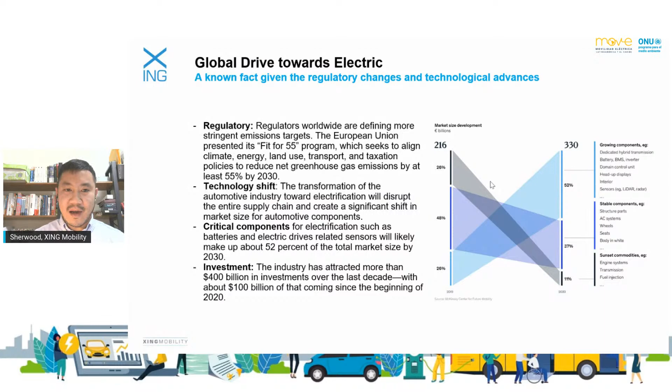I will start with an introduction to the macro landscape, which I believe many of you already understand a bit about in terms of dimension and perspective. We all know the automotive industry is one of the industry drivers for most economies, and we know that in the past internal combustion engine era, there were different segments showing different potential and profitability in the field. As we know, there have been technology paradigm shifts and changes in drivetrain approaches.

As we can see on the screen, I have quoted a report from McKinsey. It shows the market size and market portion changes. In the middle of the chart, you can see there are 48%, which we call stable components — structure parts, AC systems, wheels, seats, and whichever parts of a vehicle you can think of. Gradually, through the paradigm shift, this remains relatively stable but still decreases a bit, to 27%.

Between 2019 and 2030, there are a few components we believe would be dropping in terms of percentage — the original critical parts, engine systems, transmission, fuel injection — which might decrease from 26% to 11% according to McKinsey's research. The growing part, which I know is the critical and expected topic of today, would be dedicated hybrid transmission, batteries, domain control, and all the systems which would emerge in the electrification era. These we find would nearly double, growing from 26% to 52% in 11 years.

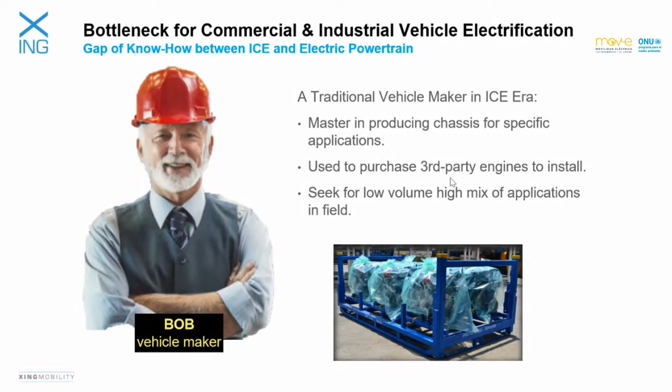Also, because of the variety of applications in the field, Bob is seeking low volume, high mix application capability. However, during this time, he suffers some bottleneck while pursuing electrification, because there's a de facto gap of know-how between internal combustion engines and electric powertrains. The gap we've identified is that the know-how is totally different, from automotive electronics to a high voltage system in terms of powertrain on electric vehicles.

So it's definitely not easy to inherit such ability from previous experience. That's also what we see in how other automotive makers are competing hard with Tesla, because this experience wasn't accumulated in the past development of their business.

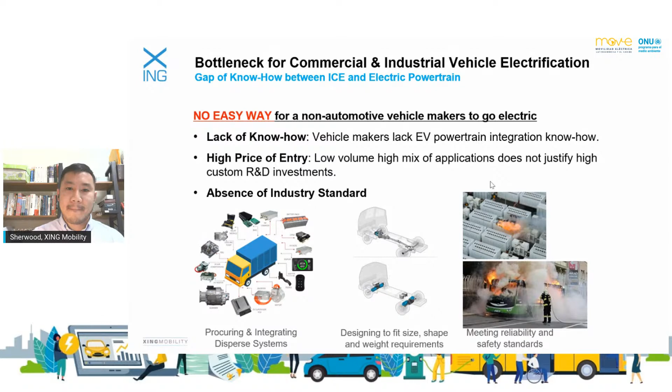Among these bottlenecks, there is a very serious part which would be challenging for all the mechanical engineering and technicians. Some of you might know Tesla is an expert on computing and the auto driving system. Tesla is also the largest battery pack provider in the world. Why battery pack is such an important factor is because on an electric vehicle, there is a very key factor which will affect the whole entire performance of the vehicle, which would be the heat.

We know the battery temperature would go high as we are charging and discharging the whole system. Now there's a second source of heat, which we know as power electronics, which could go as high as 100 Celsius degrees or even up to 175 Celsius degrees. These heat sources impact the whole system design and the whole management concept of the vehicle.

We know there have been a few car fire accidents with Tesla every quarter or every half a year. We also are aware that there was a very tremendous battery wall accident in Australia earlier, in August and September this year. These are deriving from the NMC battery cell characteristics in nature.

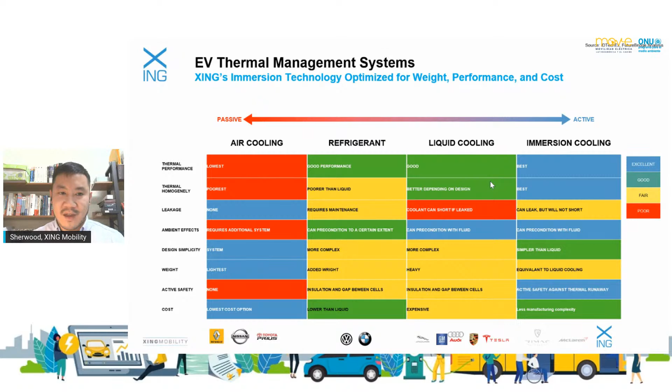I will not go through the whole table for you, but let me give you a quick conceptual explanation of immersion cooling, emphasizing some of the advantages of the system. Immersion cooling is to put the battery cell into a dielectric liquid, as I just mentioned on the previous page.

The batteries we have tried to use are cylindrical battery cells, 18650 or 21700, both suitable for such designs. As we immerse and sink these battery cells in the liquid, all the surface of the battery cell can be cooled evenly, so 100% of the surface is contacted, providing superior thermal management.

Because the liquid itself is non-conductive and non-flammable, when an accident happens, the whole system provides initial support to safety, allowing the driver and system operator to avoid the risks perfectly.

Thirdly, because there is an active circulating system that circulates the liquid through the whole system, even if there is very high temperature in the battery system, the circulating cooling system will be able to manage it through sensors and chips set into the system to support cooling efficiency.

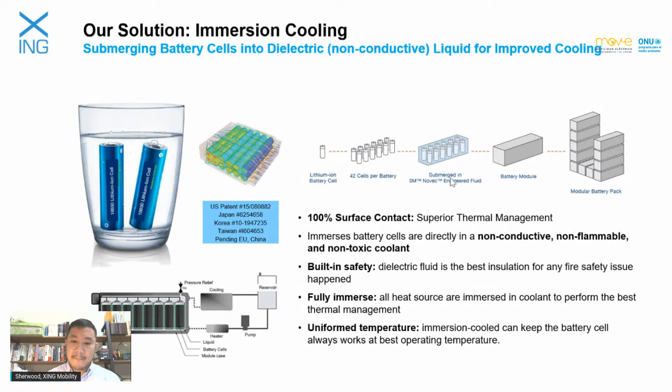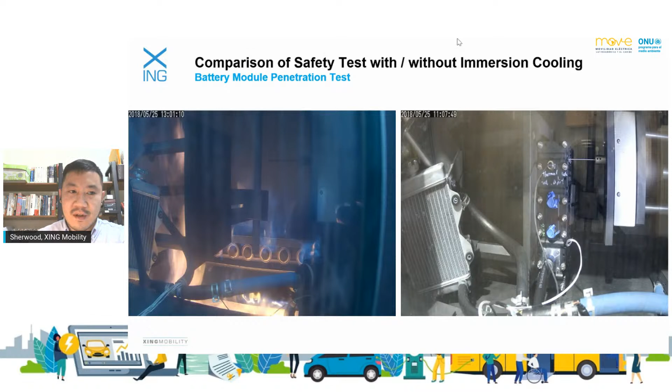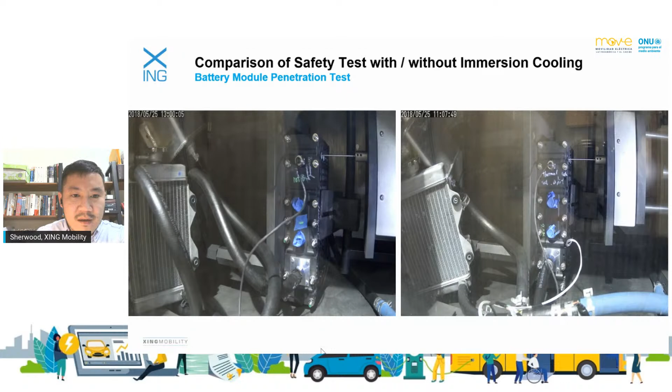On the left-hand screen, you can see a needle approaching the battery module to a specific battery cell. As it's damaged, you can see sparking coming out, and it instantly goes into thermal runaway.

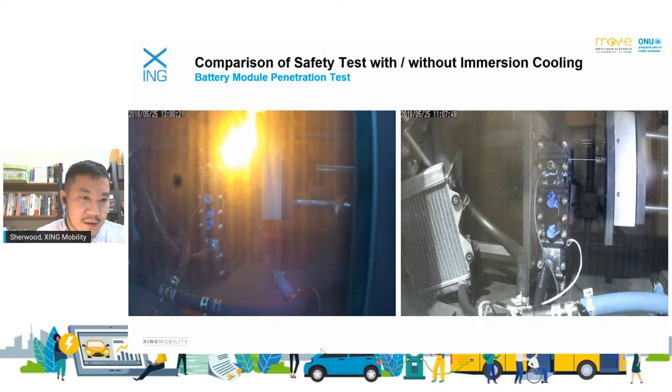As time goes on, you can see there is a timer on the screen. It gradually brings the heat up to the neighboring cell, and eventually results in a chain effect within just a few seconds. After a few seconds, the whole module explodes in the laboratory. This is actually how things happen in an electric vehicle if it's using an NMC battery cell without immersion cooling design.

So within just a minute, the battery system crashed like a very explosive material on the vehicle.

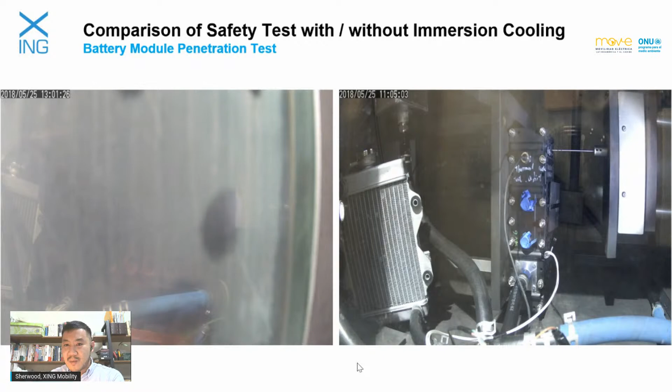On the right-hand side, the same needle penetrates the same battery cell on the same module, but with immersion cooling running. When the battery module and cell is damaged, steam and pressure are released through the system, like a vault ejecting the fluid, and steam comes out because the temperature did go high when the battery cell was damaged.

But the coolant and active cooling system circulate to bring the heat away, avoiding the neighboring cell catching fire through the chain effect. So even though certain battery cells would be damaged through an accident on the electric vehicle, the whole concept and design of immersion cooling can perfectly avoid thermal runaway, even on an active NMC battery system.

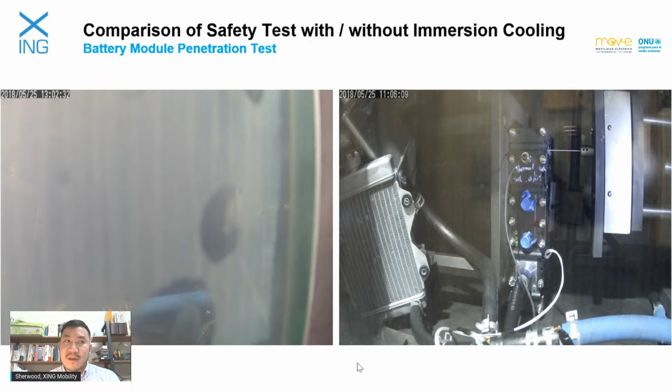With such a test comparison, made by XING Mobility three years ago, we find out the safety and risk aversion are very supportive to the electric vehicle, even when the vehicle gets damaged or is under very extreme working conditions.

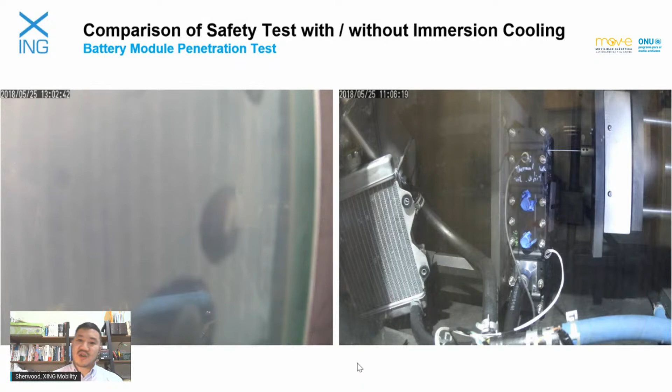So as XING Mobility...

Introducing immersion cooling through patents to a lot of countries, we believe with such nature of extended life cycle and the ability to enable ultra fast charging and discharging, this is probably the coolest system in the world at this moment to support electric vehicle operation, while the flexibility and efficiency to manufacture is also bringing huge cost saving and tech time to all the fleet owners who would like to do electrification of their business fleet.

Through our experiments and tests, you can see on the right hand side a picture indicating one battery cell being damaged during the experiment. All the neighboring cells, as you can tell on screen, after our test of voltage and current, are still working to support the whole system operation. So this unprecedented fire safety nature is definitely giving immersion cooling the name of the safest system to support electric vehicles.

Such technology was introduced by the company XING Mobility, as Juan has introduced, where I'm coming from. We're the global leader in immersion cooling for EV battery systems and power electronics.

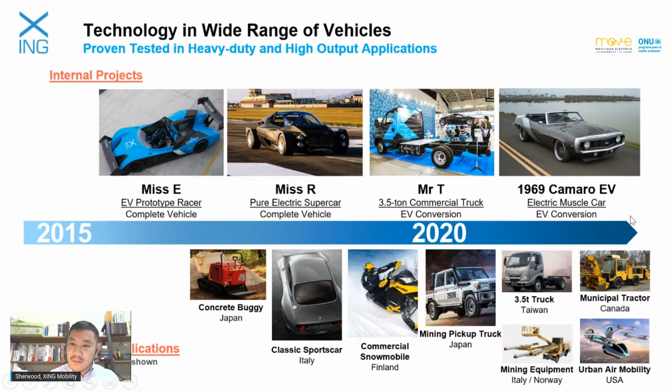As I have stated in the beginning, XING Mobility is a company dedicated to design and manufacturing battery systems. We have applied for and been granted 9 patents worldwide through immersion cooling and modularity design, with a few pending in different countries. We're not a battery cell maker. We also procure from

famous battery cell makers in Korea and Japan, and cooperate with them and with our vehicle maker customers. We provide know-how to design a battery module and battery system, and eventually integrate it into the vehicle to fulfill the electrification target. Combining this with our experience in integrating high voltage systems on race cars, XING Mobility is not in charge of system integration, but is capable of supporting the relative accessory and integration if the

customer is looking for such services remotely. But in the meantime, we still target to provide the battery system solely for most of the vehicle maker customers.

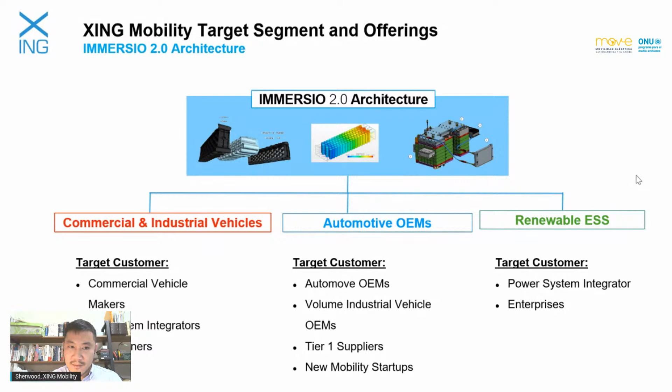XING Mobility has planned and tried to deliver over the past 6 years, and some of the achievements we've reached have been endorsed internationally. We've seen huge growth in the past year - though XING Mobility is a startup in Asia, we have been engaged with customers internationally.

There are customers in Europe and some customers in the United States - I would not be able to share beyond that before an NDA - but there has been a customer who signed a 7-year volume order with XING Mobility for upcoming supply for commercial vehicles.

Also, earlier this year in April, XING Mobility signed a global partnership with BP Castrol. BP Castrol is an oil major in the world who is also trying to pivot their lubricant business unit into supplying dielectric liquid. So oil giants like BP Castrol and other companies will also be one of the

drivers to support immersion cooling being introduced in electric vehicles. XING Mobility will cooperate with BP Castrol to provide our second generation product with their liquid, which very soon will be able to support the market to a standard commercial vehicle requirement.